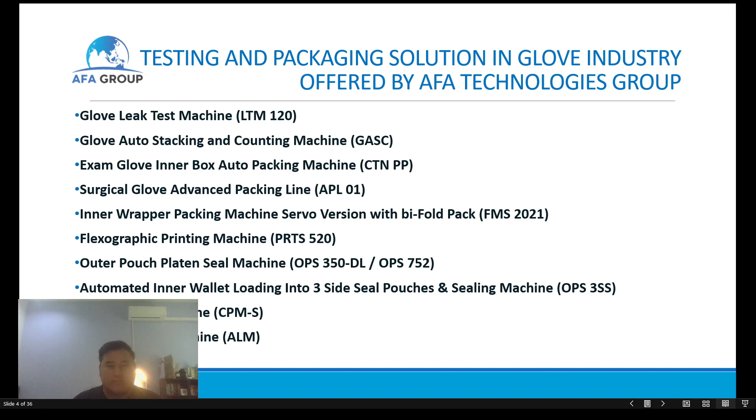Now I'm going to talk about the project I was involved in during industrial training. The project I was involved in during my training is the case packer machine, ordered by the Smart Glove company. I participated in almost every part of the machine during my training. I assembled half of the modules of the machine, and 70% of the wiring of the machine was also done by me. I was lucky enough to be able to finish the machine before the end of my training.

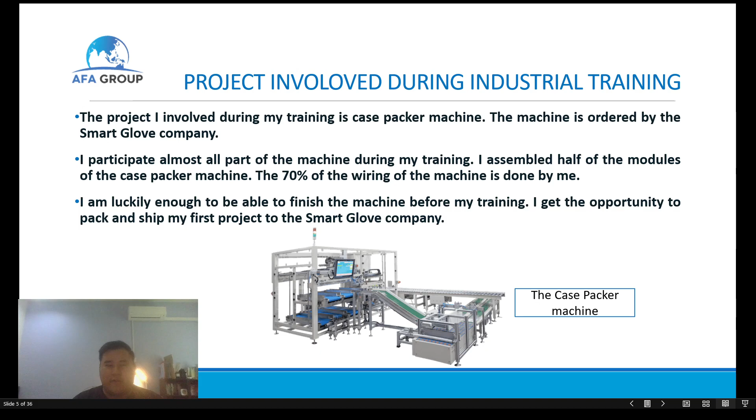I got the opportunity to pack and ship my first project to the Smart Glove company. This is the activity during my industrial training.

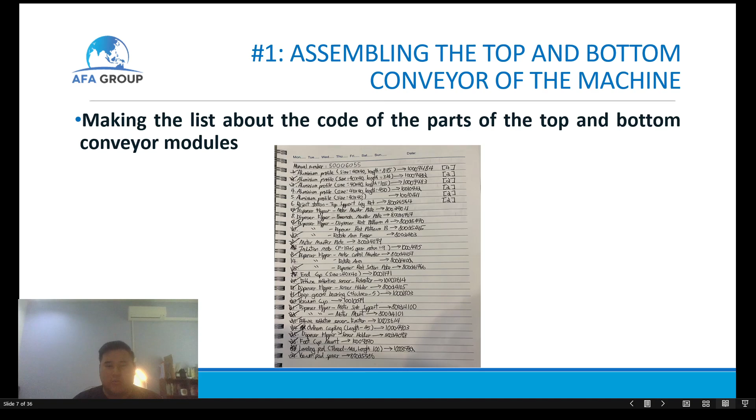Now I'm going to talk about my first activity, which is assembling the top and bottom conveyor of the machine. First I will make a list of the codes of the parts of the top and bottom conveyor module. After that, I will find the parts of the top and bottom conveyor module at the storage of the production department.

Then I will check the code of the part I found with the list of codes I made before. The code of any part that is missing or unavailable will be made into a new list and submitted to the head of the production department.

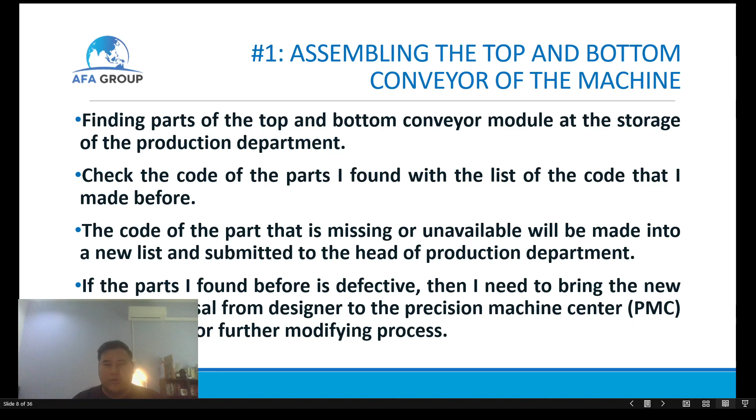If the part I found before is defective, then I need to bring the new design proposal from the designer to the Precision Machine Center, PMC department, for further modification. After that, I will assemble the three top conveyors and three bottom conveyors of the case packer machine.

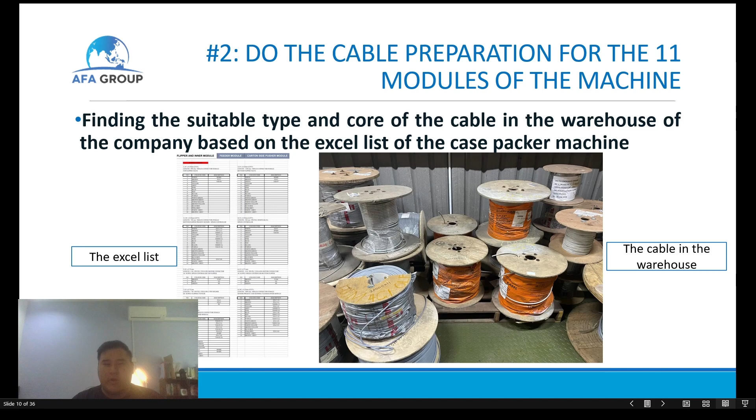Now I'm going to talk about the second activity, which is doing the cable preparation for the 11 modules of the machine. First I will find the suitable type and core of the cable in the warehouse of the company based on the Excel list of the case packer machine.

After securing all the cable required, I start to do the cable preparation of the case packer machine. First, I printed all the labels required by the wires of the modules of the machine. Then I removed the insulator of the cable based on the standard length set by the company.

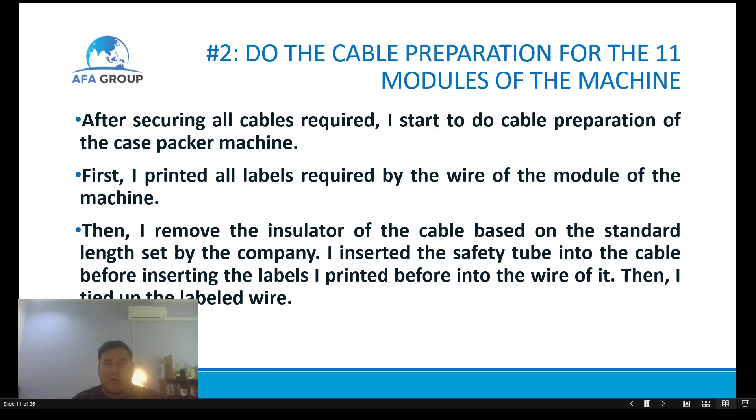I inserted the safety tube into the cable before inserting the label I printed before into the wire. Then I tied up the labeled wire. After that, I removed the insulator of the wire and crimped them with female molex pins using a molex crimping tool, then inserted the female molex pins into the three-way female molex connector.

Besides the female molex pin, I also needed to crimp the wire with ferrule pins using a ferrule crimper, or crimp the wire with cable lugs using a crimping press tool, based on the Excel file of the cable preparation. After crimping the wire, I need to blow the safety tube on the cable. Then one end of the cable is finished preparing.

The other end of the cable is required to have its insulator removed based on the standard length set by the company. Then I need to insert the label into the wire and tie it up with a knot. After that, I label the cable with a number, then the cable preparation of the module of the machine is done.

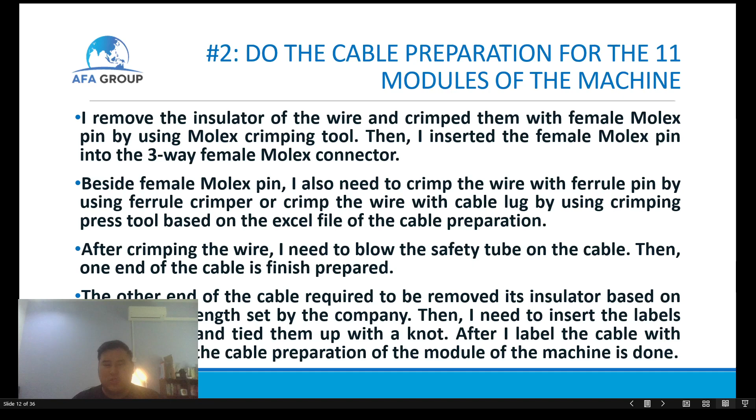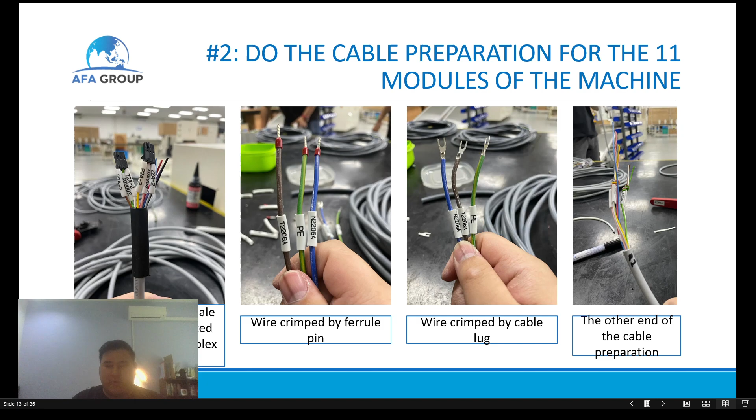Now I'm going to talk about the third activity, which is making the sub panel of the machine.

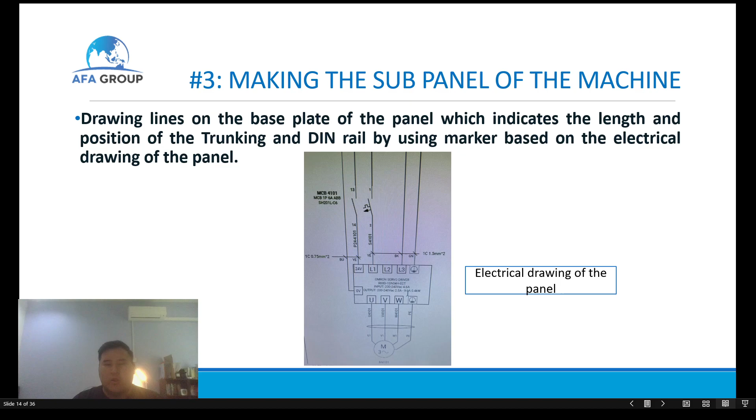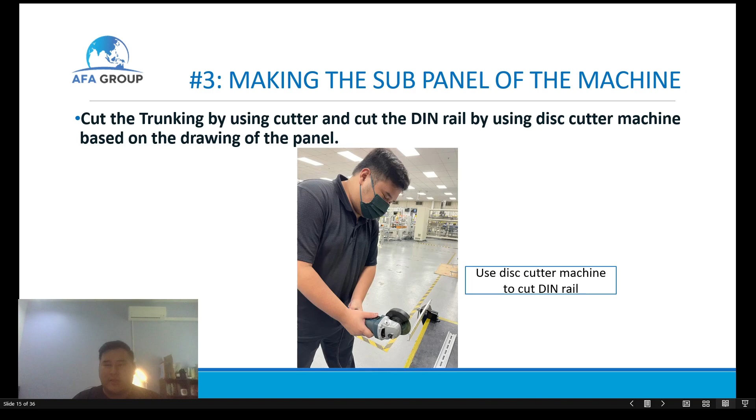First I will draw the line on the base plate of the panel, which indicates the length and position of the trunking and the DIN rail, by using a marker based on the electrical drawing of the panel. Then I will cut the trunking by using a cutter and cut the DIN rail by using the disc cutter machine based on the drawing of the panel.

Then I will place the prepared trunking and DIN rail on the line that I drew before on the base plate of the panel. Then I will mark the base plate through the holes of the trunking and DIN rail. After that, I will remove the trunking and DIN rail and start the drilling and tapping process on the marks I made before.

After that, I will screw all the trunking and DIN rail onto the base plate. Then install the electrical parts like MCB, terminal, PLC coupler and power supply on the rail. Finally, I will do the termination of the sub panel based on its drawing.

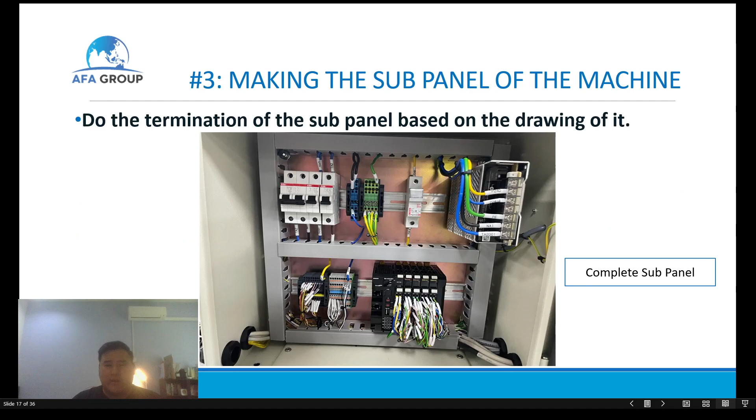Now I'm going to talk about my fourth activity, which is assembling all internal modules on the main structure of the machine. The modules I need to assemble are top PNP, bottom PNP, top conveyor, bottom conveyor, pusher, and pusher pitching.

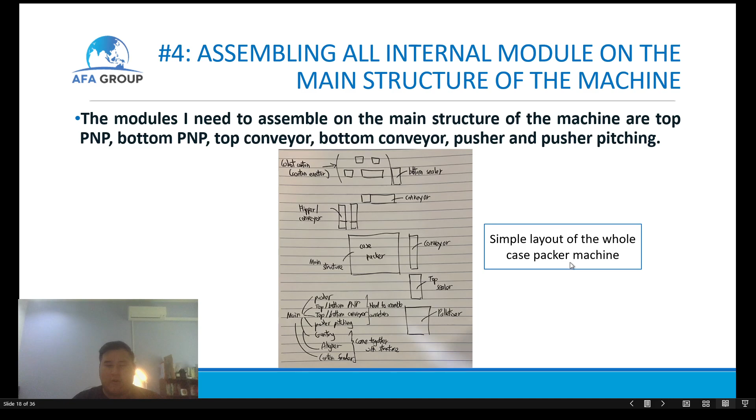This is a simple layout of the case packer machine. After that, all modules except the top and bottom conveyor can be directly assembled on the main structure of the machine. This is because on the main structure, the holes for the modules are already drilled. All we need to do is assemble them on the structure based on the drawing.

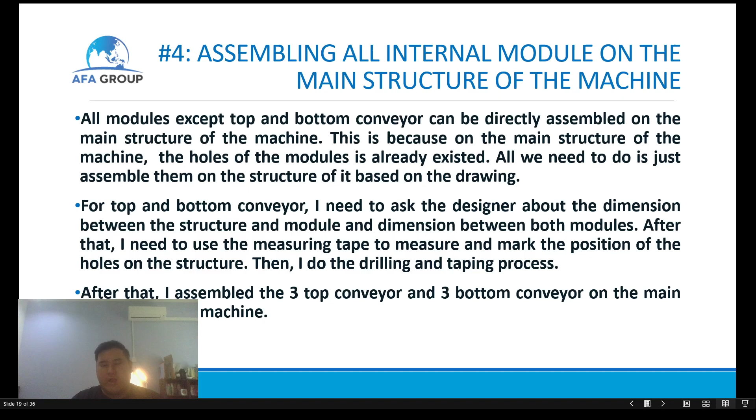Now I'm going to talk about my fifth activity, which is doing the wiring of the top and bottom conveyor. First I will do the cable dressing and cable preparation of the motor for the 6 conveyors to the main panel of the machine, by using the cable base on the main structure.

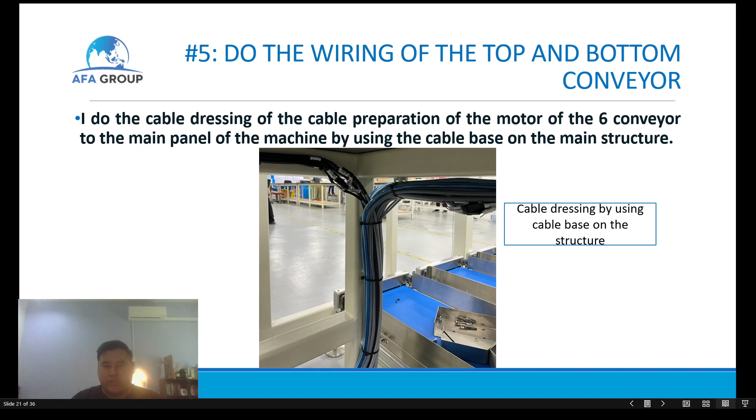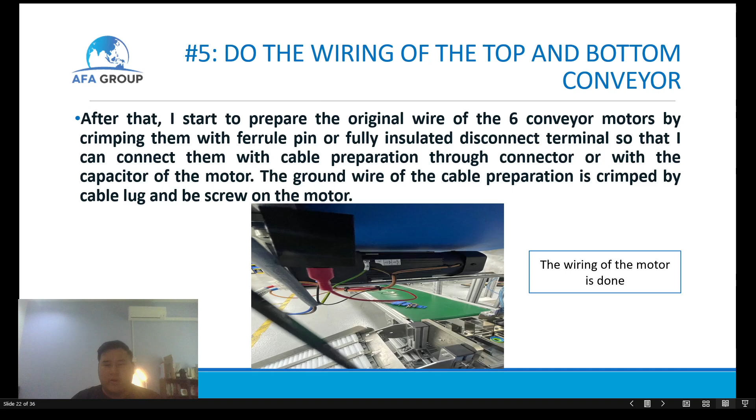After that, I start to prepare the original wire of the 6 conveyor motors by crimping them with ferrule pins or fully insulated disconnect terminals, so that I can connect them with the cable preparation through a connector or with the capacitor of the motor. The ground wire of the cable is crimped with a cable lug and screwed onto the motor.

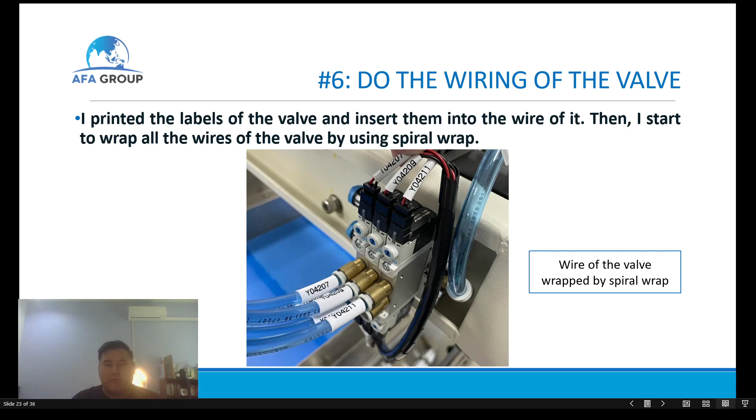Now I'm going to talk about activity 6, which is doing the wiring of the valve. I will print the label of the valve and insert it into the wire. Then I start to wrap all the wires of the valve using spiral wrap.

After that, I crimp all the wires of the valve with male Molex pins and insert them into the three-way male Molex connector based on the drawing. Then I do the cable dressing and cable preparation of the valve to the main panel. I connect the three-way male connector of the valve with the three-way female connector of the cable preparation based on the label.

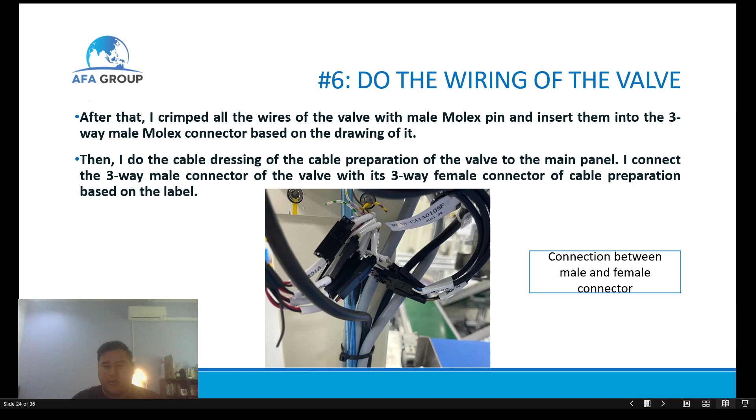After that, I measured and estimated the length between the valve and the top PNP module. Then I cut 6 pneumatic tubes based on the length I measured. I printed the labels for the tubing and inserted them onto it. After that, I inserted the labeled tubing into the fitting of the valve based on the electrical drawing.

Then I tied the tubing with a cable tie. Then I dressed the tubing to the fitting of the top PNP module using a cable chain and cable base.

I inserted the tubing of the valve into the fitting of the top PNP module.

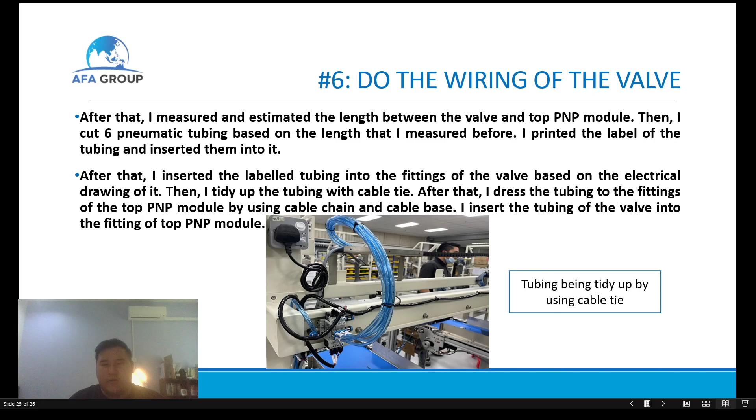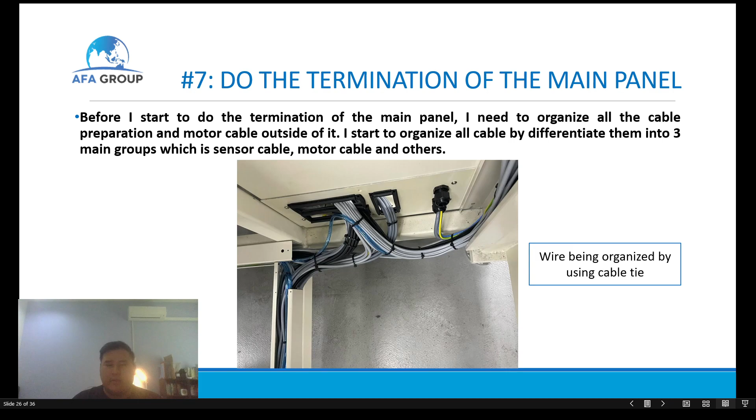Now I'm going to talk about my seventh activity, which is doing the termination of the main panel. Before I start the termination, I need to organize all the cable preparation and motor cable outside of it. I start by organizing all cables into 3 main groups: sensor cable, motor cable, and others.

I do the termination of 10 motor cables with the servo driver in the main panel. I tidy the 10 motor cables with cable ties and dress them inside the trunking of the main panel so that I can connect them with the servo driver neatly.

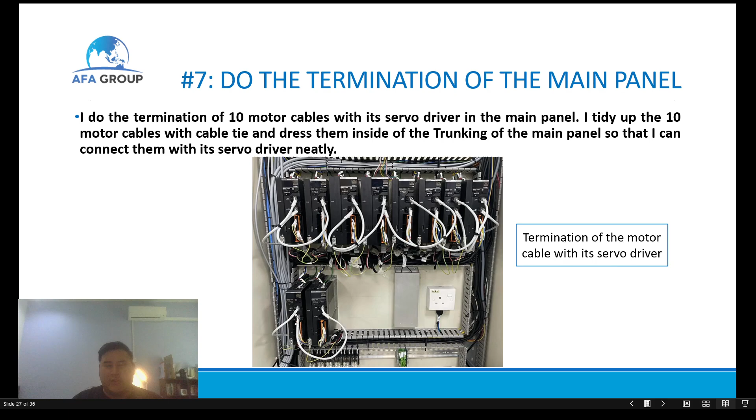After that, I dress all the sensor cables inside the trunking of the panel to the area of the P24-2 terminal, Z24-2 terminal, ground terminal, and homing terminal. Then I cut the excessive long cable with a cutter, remove the insulator of the cable, crimp the wire with a ferrule pin, and connect them to different terminals based on the instruction of the label.

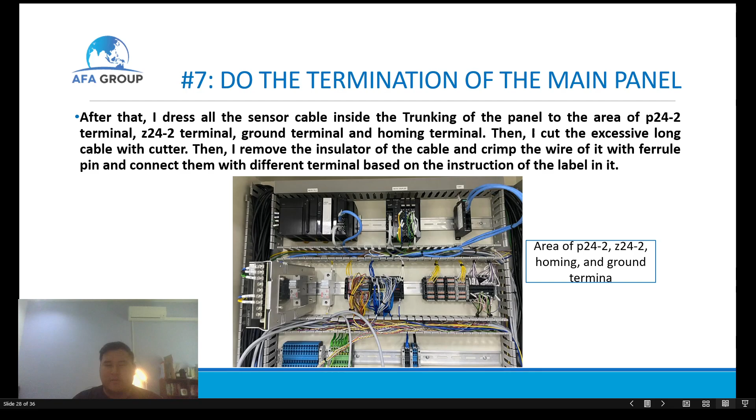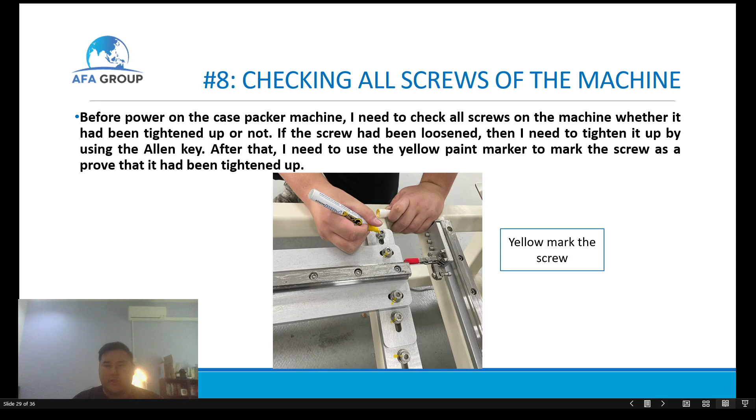Now I'm going to talk about my eighth activity, which is checking all screws of the machine. Before powering on the case packer machine, I need to check all screws to see whether they have been tightened up or not. If the screw had been loosened, I need to tighten it up using the Allen key. After that, I use a yellow paint marker to mark the screw as proof that it had been tightened up.

Now I'm going to talk about my ninth activity, which is carrying out the I/O check of the machine. I do the I/O check of the sensors using a tester under the guidance of my trainer. The purpose of the I/O check is to verify that the connection of the sensor was done correctly.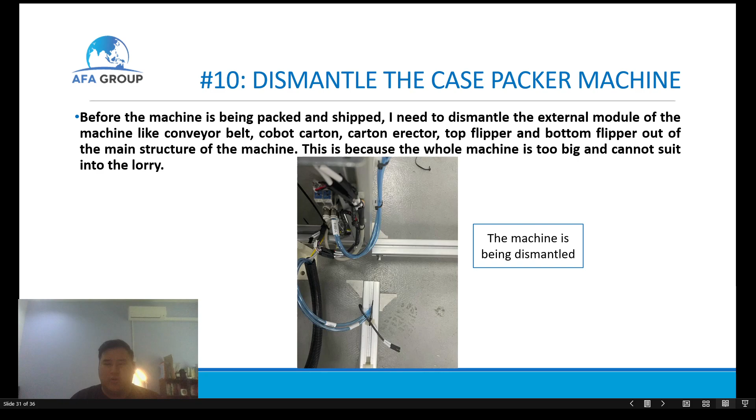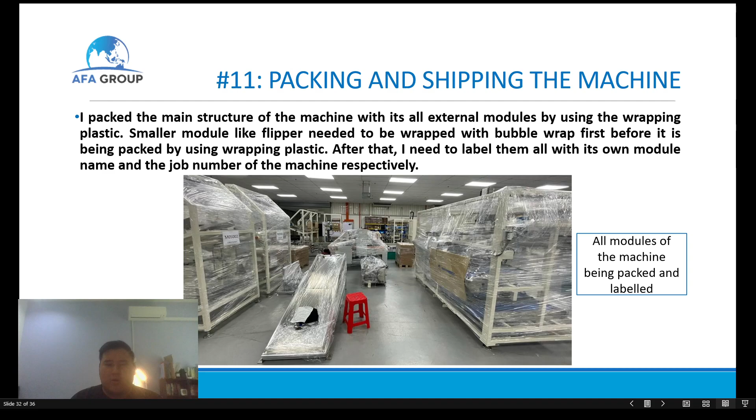Now I'm going to talk about my last activity, which is packing and shipping the machine. I pack the main structure of the machine with all its external modules using wrapping plastic. Smaller modules like the flipper need to be wrapped with bubble wrap first before being packed with wrapping plastic. After that, I label them all with their module name and the job number of the machine respectively. This is the picture of it.

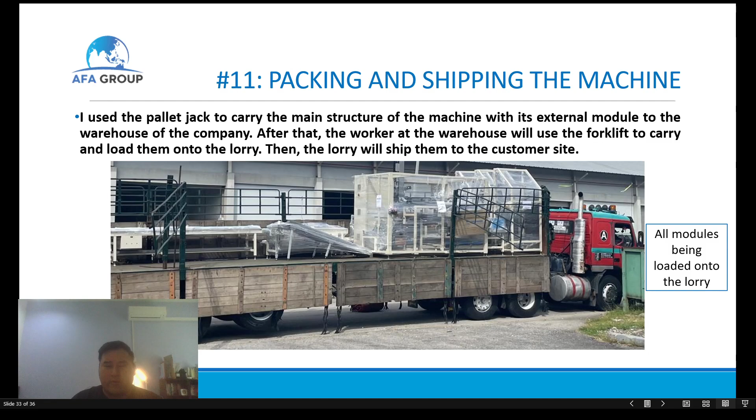After packing, I use the pallet jack to carry the main structure of the machine with its external modules to the warehouse of the company. After that, the worker at the warehouse uses the forklift to carry and load them onto the lorry. Then the lorry will ship them to the customer site.

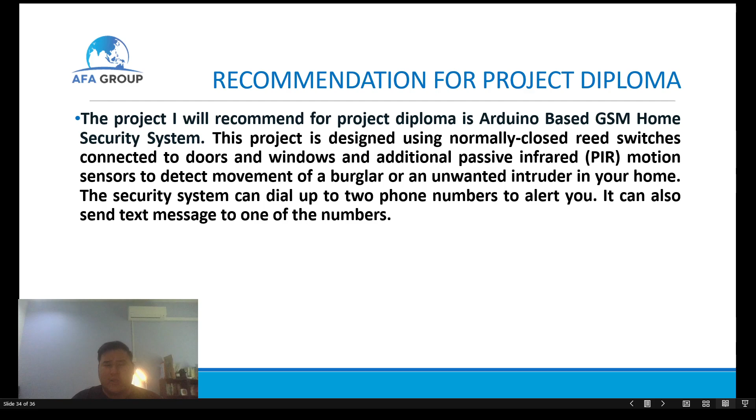Now I'm going to talk about my recommendation for Project Diploma. The project I recommend is an Arduino-based GSM home security system. This project is designed using normally closed reed switches connected to doors and windows, plus an additional passive infrared PIR motion sensor to detect the movement of a burglar or an unwanted intruder in your home. The security system can dial up to two phone numbers to alert you, and it can also send a text message to one of the numbers.

In conclusion, there are several improvements needed during the internship, such as good management skill for multiple tasks, good communication skill, and strong listening skill. I have learned and developed much during the internship period at AFA Technology Group. It has been a very challenging and meaningful time and experience for me. It allowed me to develop new skills and become a better team player. Industrial training gave me a golden opportunity to gain knowledge and experience in the workplace.